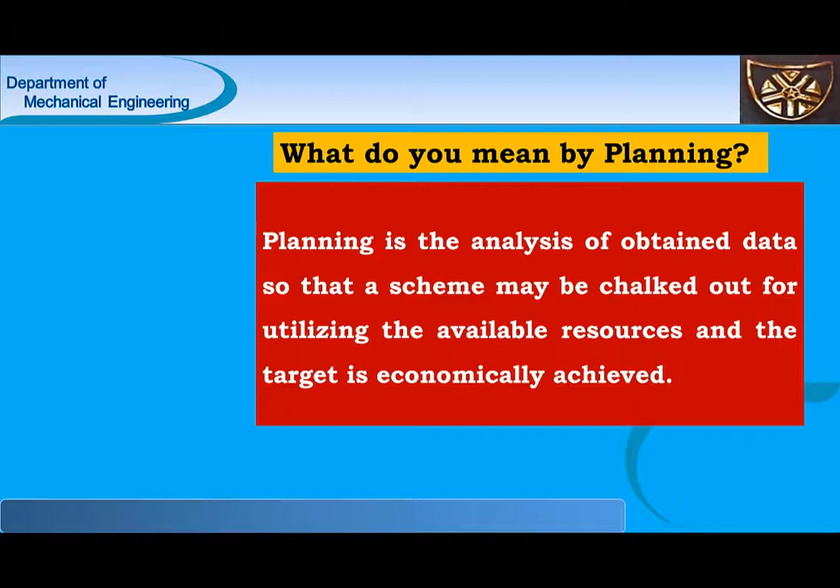In this slide, I am going to explain about planning. What do you mean by planning? As per the definition, planning is the analysis of obtained data so that a scheme may be chalked out for utilizing the available resources.

Resources may be in the form of men, machines, materials, and money. And finally, the target is economically achieved. Here, economically means lowest cost. With lowest cost, we have to perform all the manufacturing activities.

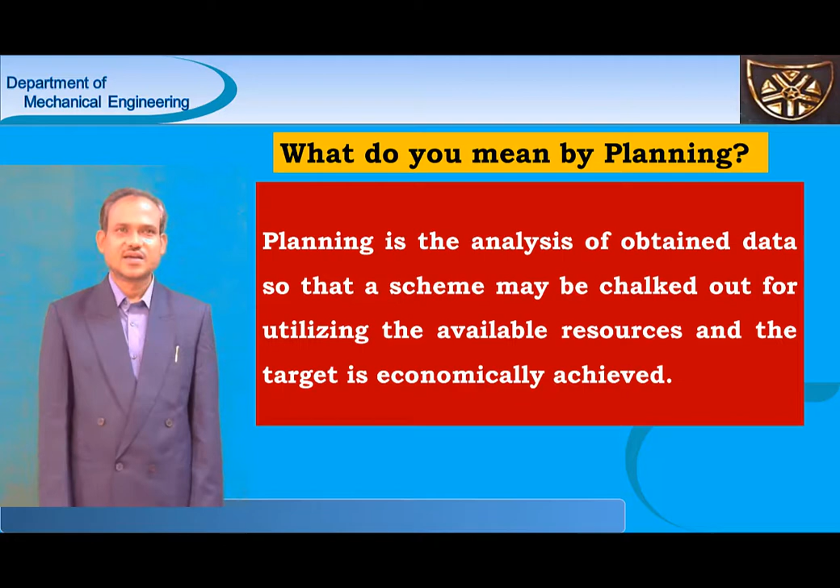Therefore, planning is the analysis of obtained data so that a scheme may be chalked out for utilizing the available resources, and the target is economically achieved.

Next, coming to what do you mean by control, production control? Production control is the supervision of all the manufacturing operations with the help of a control mechanism that feeds back the progress of work.

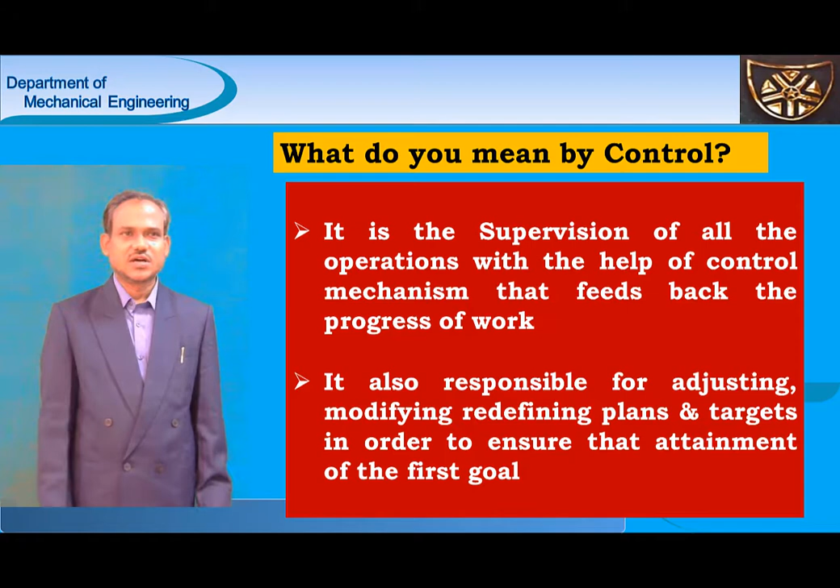And by using this mechanism, it is also responsible for subsequently adjusting plans, modifying plans, and redefining plans and targets in order to ensure the attainment of the goals of the organization.

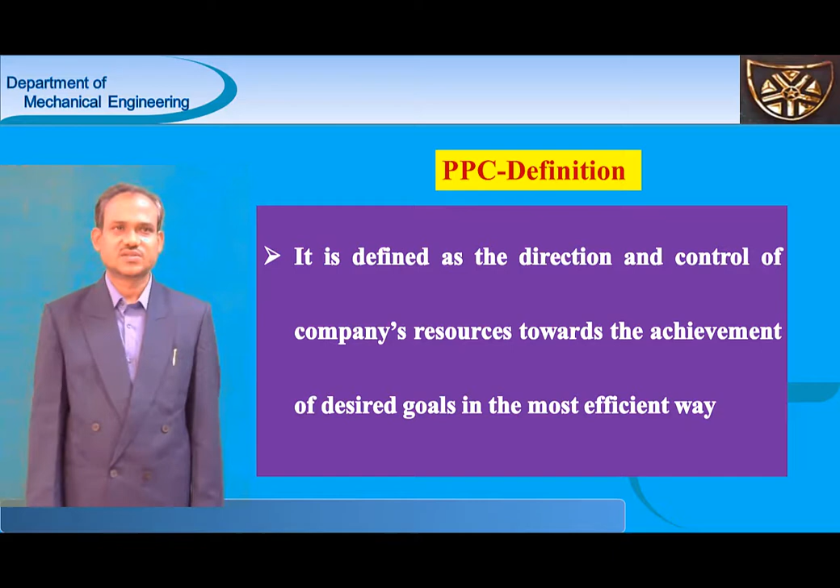In this slide, I would like to define PPC. How can we define PPC? PPC means production, planning and control. PPC can be defined as the direction and control of company resources towards the achievement of desired goals in the most efficient way. Next, coming to the importance of PPC.

Production, planning and control is needed to achieve certain goals. First point is the effective utilization of firm's resources. For effective utilization of all the resources, which may be in the form of men, machines, materials and so on, PPC is required. PPC is one of the tools. This is the first point.

Second point is to achieve the production objectives with respect to quality, quantity, cost and timeliness of delivery. Timeliness of delivery is also a very important parameter from the customer's angle.

Next, coming to the third point: to obtain the uninterrupted production flow in order to meet the customers' varied demand with respect to quality and a committed delivery schedule.

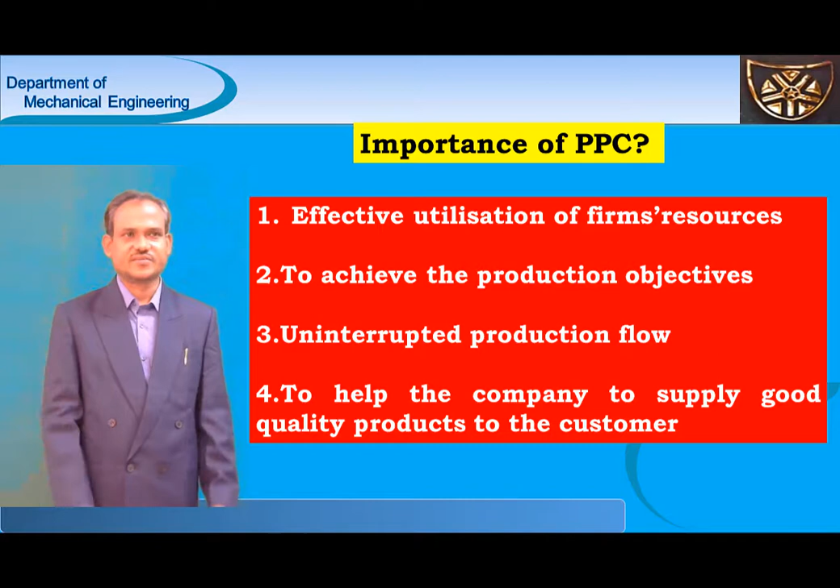In this slide, I am going to explain about the objectives of PPC. First objective is to deliver the goods in required quantities to the customers in the required delivery schedule. This is the first and foremost objective of PPC.

Second objective is to make sure that there is maximum utilization of all the available resources. Third point is to make sure that the produced products maintain a reasonable quality.

Next one is to minimize the product throughput time. What do you mean by throughput time? It is the time gap between the starting of the production activities and the ending of the production activities. This time we have to minimize, and with the help of the PPC tool, we can minimize this throughput time.

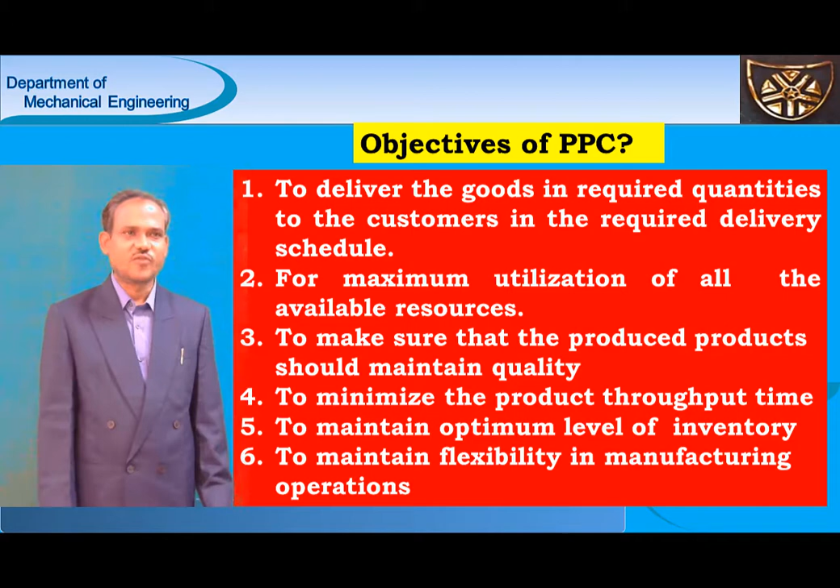Functions are also known as activities. What are the activities involved in production, planning and control? There are 10 activities or 10 functions. First of all, I would like to list out all the 10 functions.

First one is materials. Second one is machines and equipment. Third one is methods. Fourth one is process planning, also known as routing. Fifth one is estimating. Sixth one is loading and scheduling. Seventh one is dispatch. Eighth one is expediting, also known as follow-up. Ninth one is inspection. And the 10th one is evaluation.

In the next slide, I am going to explain about all the 10 functions.

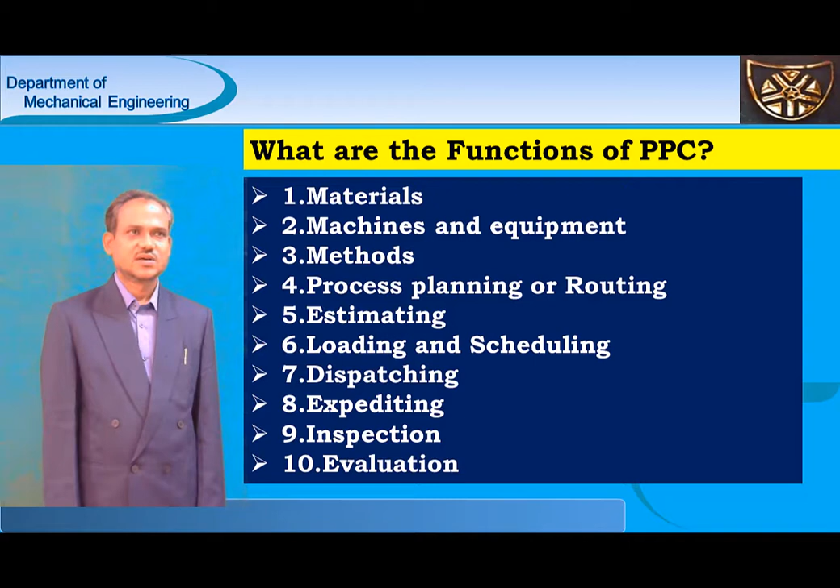First 6 functions are related to planning. Remaining functions, that means from dispatching onwards, 7 to 10 functions are related to controlling functions. There are 4 controlling functions. I will discuss about these in the next slide.

First function, that is planning function, known as materials. It is one of the important resources, particularly in a manufacturing organization, because 60% of the money goes to purchase these materials. Remaining 40% goes to get other resources.

This function is concerned with the raw materials, bought out components, spare parts, finished parts of a product, and these must be made available before starting of the production operations, and also within the required time.

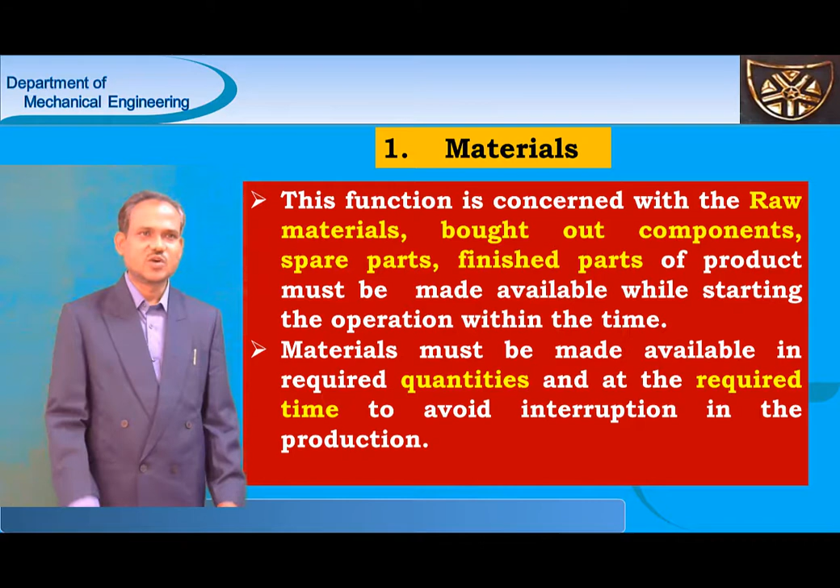Depending upon the stage of production, materials can be classified into various types: raw materials, work in process materials, finished products, etc. Therefore, these materials must be made available in required quantities and at the required time to avoid interruption in the production. Next, coming to the second function.

Machines and equipment. It is also a planning function. Particularly, this function is related with the detailed analysis of all the available production facilities and also equipment downtime.

And maintenance policy, procedure, and also on schedules. Scheduling is nothing but the timings for the operations.

It is also concerned with the economy of jigs and fixtures and equipment availability. What do you mean by jig and fixture? Already studied in third year. Jig is one of the equipment in machine tool side, a device used to hold the tools, whereas fixtures hold the workpieces.

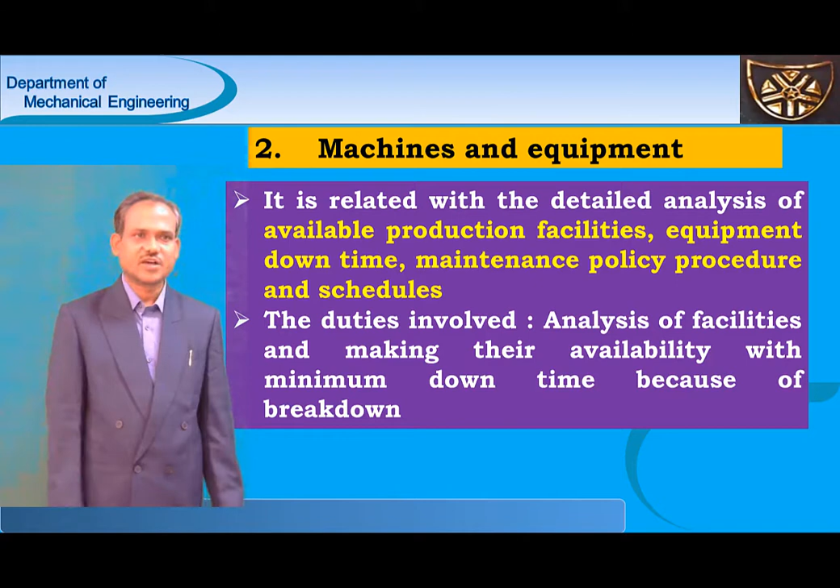Fixture is a device used to hold the workpieces firmly. Therefore, the duties involved in this function are analysis of all the production facilities and making their availability with a minimum downtime because of breakdown of machines.

Next, coming to the third planning function, methods. This function is concerned with the analysis of all the available manufacturing methods and selecting the best appropriate and suitable method according to the given set of circumstances and production facilities. Production facilities may be machines, manpower.

First, what do you mean by best method? Best method means it must be simple to use, with less human effort and more comfort, and it should take less time to finish that product.

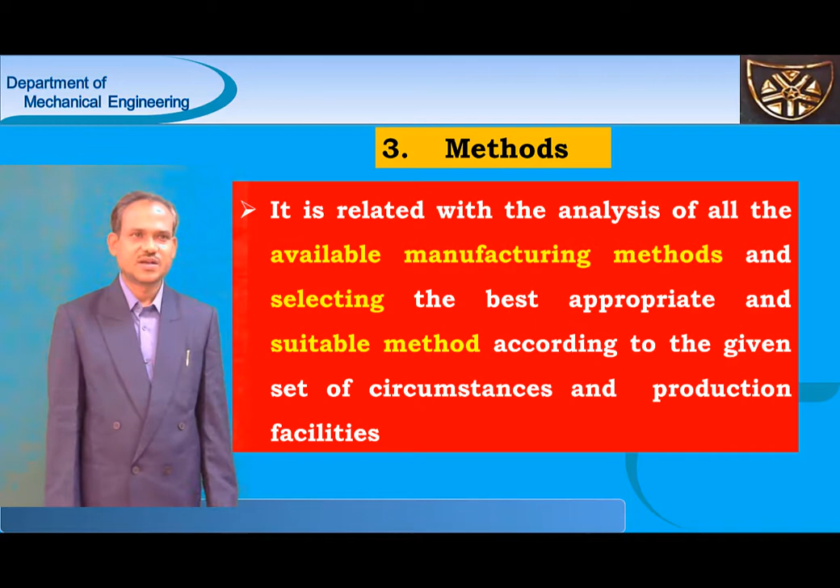Next, coming to the fourth planning function, known as process planning. What do you mean by process planning? Sometimes process planning is also known as routing, routing of the materials. This process planning is concerned with the selection of path or route which the raw material should follow to get transformed into finished product.

What are the duties involved in this function? There are three duties. First is the fixation of path of travel by giving consideration to the plant layout.

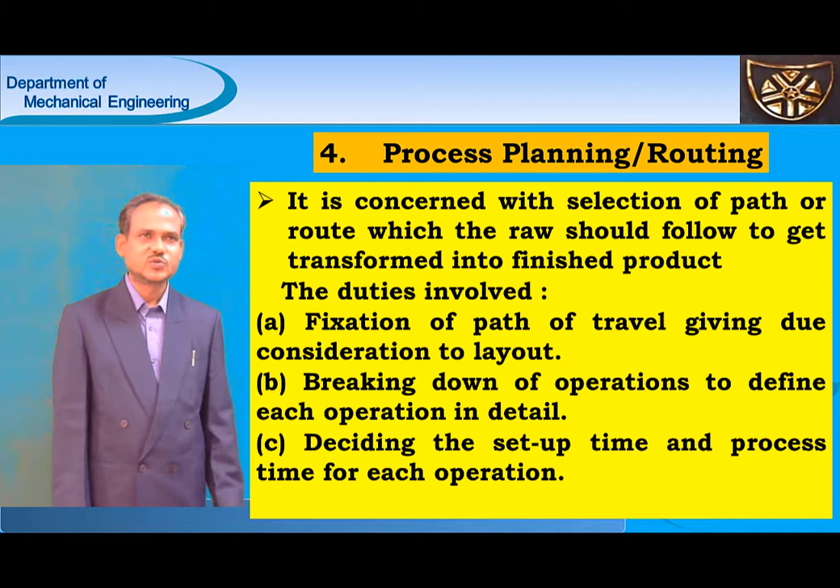Second, in process planning, is breaking down all the operations to define each operation in detail. Next, the third important duty is deciding the setup time and process time for each operation. So these three are the duties in process planning.

Next, coming to the fifth planning function, estimating. What do you mean by estimating? Once the overall method and sequence of operations is fixed and a process sheet for each operation is available, then the operation times are estimated.

Operation times are estimated. This function is carried out using extensive analysis of operations along with methods and routing, and finally we determine standard time for all operations by using work measurement technique. With this technique, we can determine the standard time for the operations.

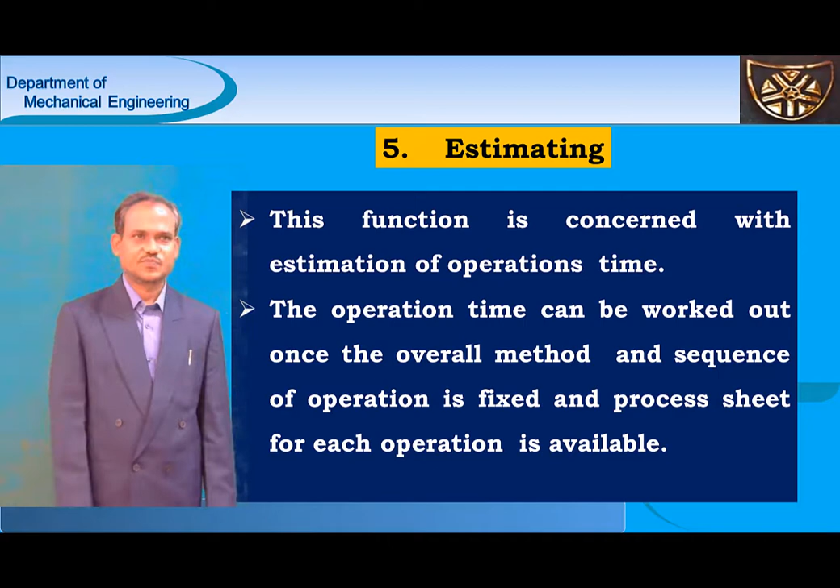Next, coming to the sixth planning function, known as loading and scheduling. Briefly, in simple words, what do you mean by loading?

Loading is the assignment of machines to the jobs based on their capability and capacity. But scheduling is related to the timings for the manufacturing operations. Therefore, in loading, machines have to be loaded according to their capability of performing the given task and based upon their capacity. Whereas in case of scheduling, it is concerned with the preparation of machine loads and fixation of starting and completion times for each of the operations.

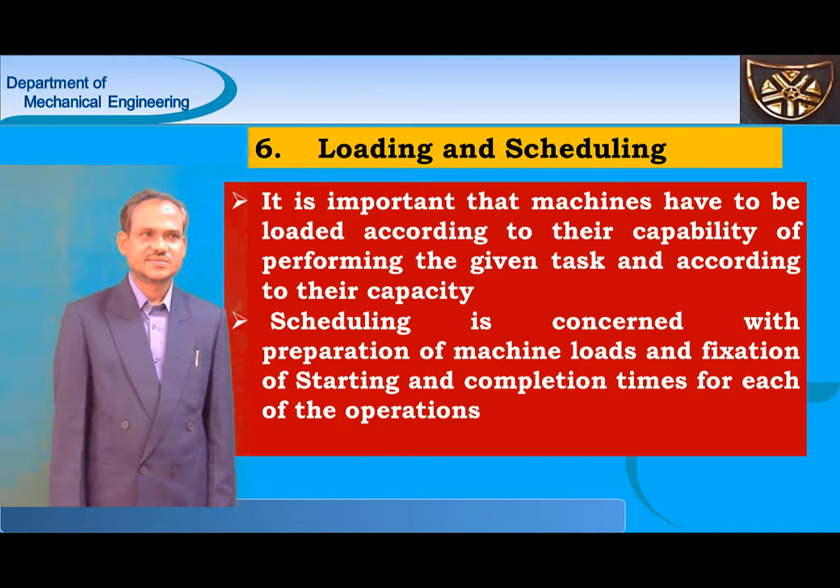Therefore, the three important duties involved in this function are: first, loading the machines as per their capability and capacity. Second, determining the start and completion times for each operation. And third, to coordinate with the sales department regarding delivery schedules.

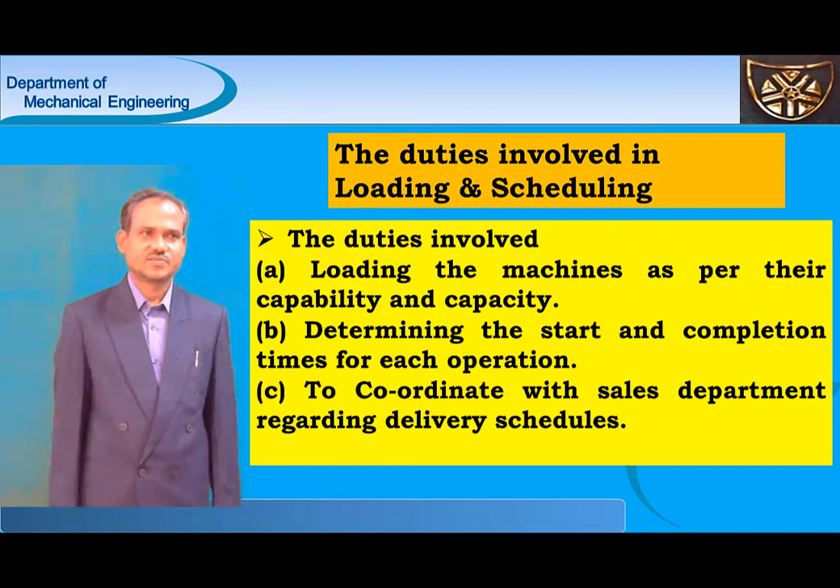Coming to the next function, that is dispatching. Dispatching function is related with the control function. It is one of the control functions. What do you mean by dispatching? This is the execution or implementation phase of planning. It is nothing but the process of setting production activities in motion by release of work orders and instructions to the workers.

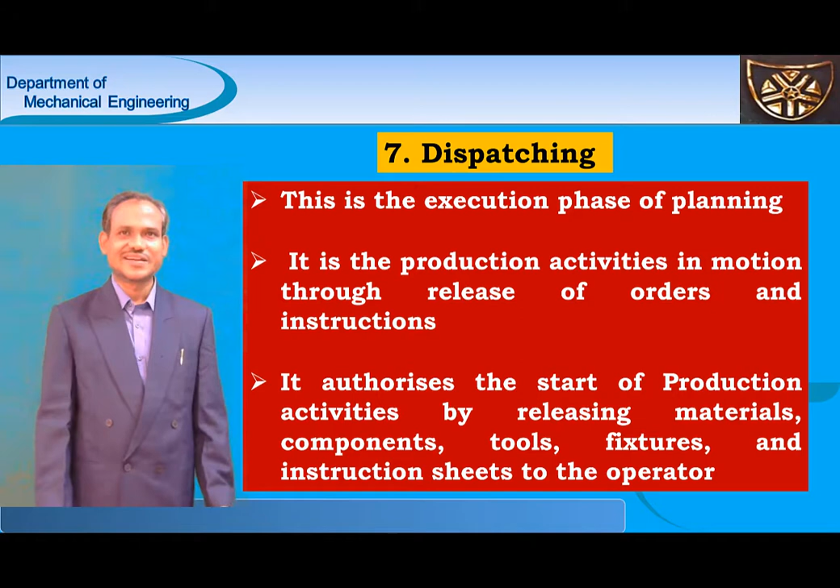In simple words, I can say dispatching like this. Dispatching is the authorization to start the production activities by releasing required materials, required components, tools, fixtures and job instruction sheets to the operators. Next, what are the activities involved in this dispatching function?

There are 5 important activities in this dispatching. First, to assign definite work to the definite machines or work centers and assign definite work to the people. Second, to issue required materials from the stores department. Next, third, to issue jigs, fixtures and make them available at the correct point of use.

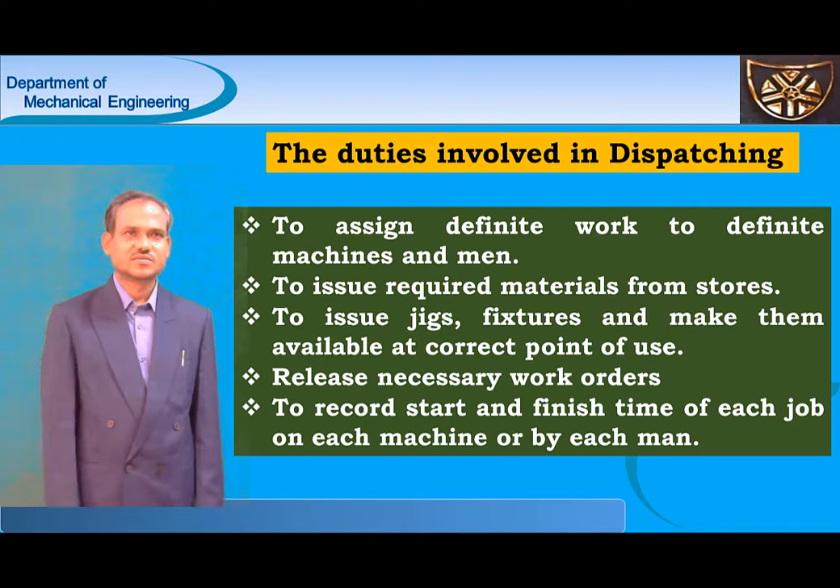Next, fourth, release necessary work orders, job instruction sheets and so on to authorize timely start of production operations. And the last one is to record the start and finish time of each job on each machine. These are the 5 activities involved in dispatching function.

Next, coming to the function known as expediting. It is one of the control tools that keeps a close observation on the progress of the work. It is a logical step after a dispatching function, which is also called as follow-up. Therefore, sometimes expediting is also named as follow up.

It coordinates extensively to execute the production plan. Usually, there are three types of follow up. First, follow up of materials. Second, follow up of work in process materials. Third, follow up of assembly.

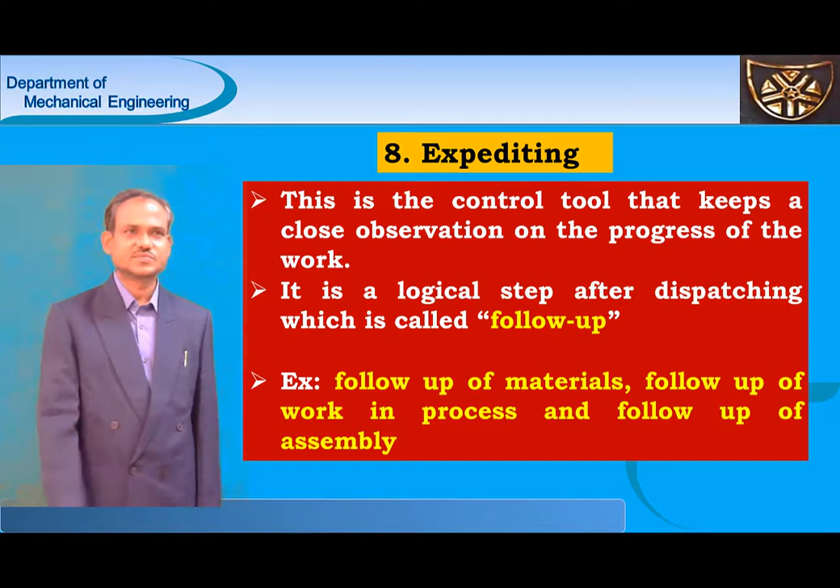Next, what are the duties involved in this expediting function? There are three important duties. First duty is for identification of production delays, interruptions and bottlenecks in the production. Otherwise, the production schedule may be disrupted.

Second duty is to devise action plans and to take remedial measures for correcting the errors or faults. And also, the last one is to see that the production rate is in line with the production schedule.

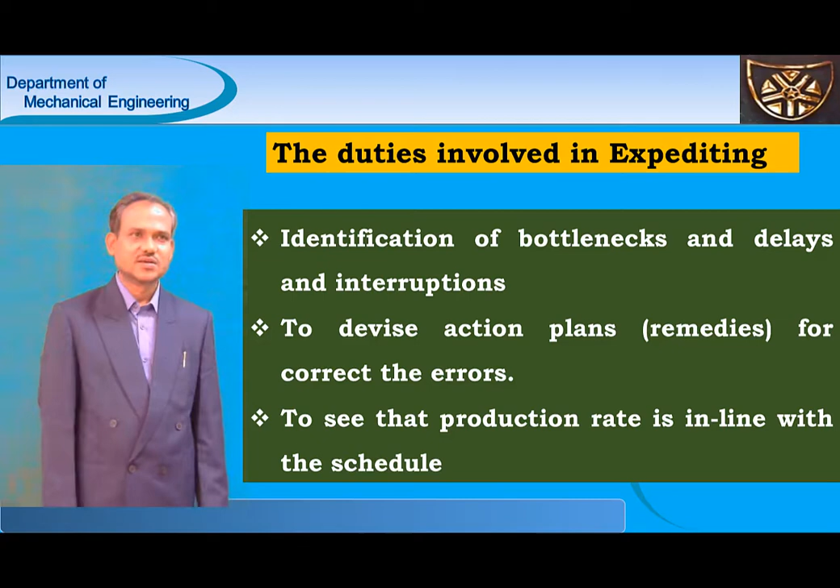Next control function is inspection. What do you mean by inspection? It is one of the control tools and is used to measure the product's quality and inputs of resources. The purpose of inspection is to see whether the products manufactured are of required quality or not. Inspection is also very much important for the execution of the current plans and in scope for future planning.

Moreover, inspection forms the basis for knowing the limitations with respect to the manufacturing methods, manufacturing process and so on, because that is very much useful for the next phase known as the evaluation phase.

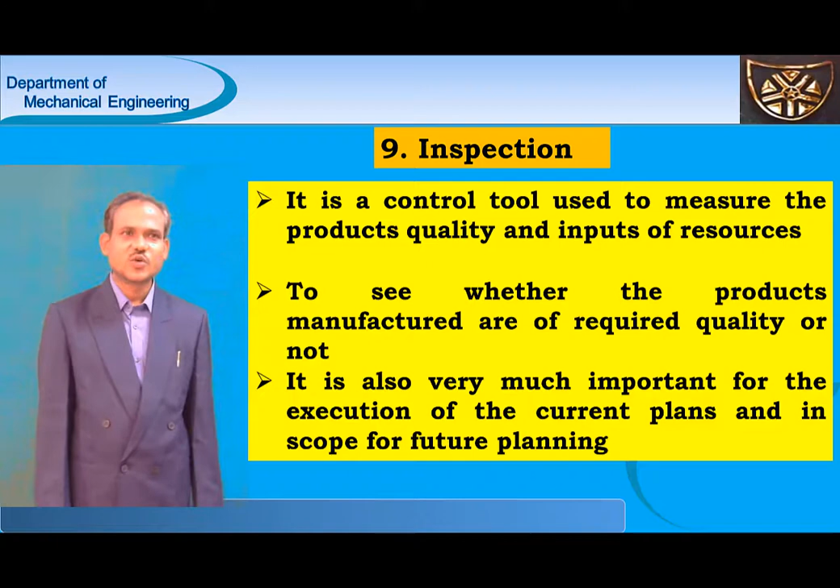And the last function is the evaluation function. What do you mean by evaluation? This is one of the last stages. This stage, though neglected, is crucial to the improvement of production efficiency. Evaluation is the thorough analysis of all the factors influencing the production planning and control that helps to identify the weak spots, and the correct action with respect to pre-planning and planning will be affected by a feedback.

The success of this step depends upon the communication, data gathering, information gathering and analysis.